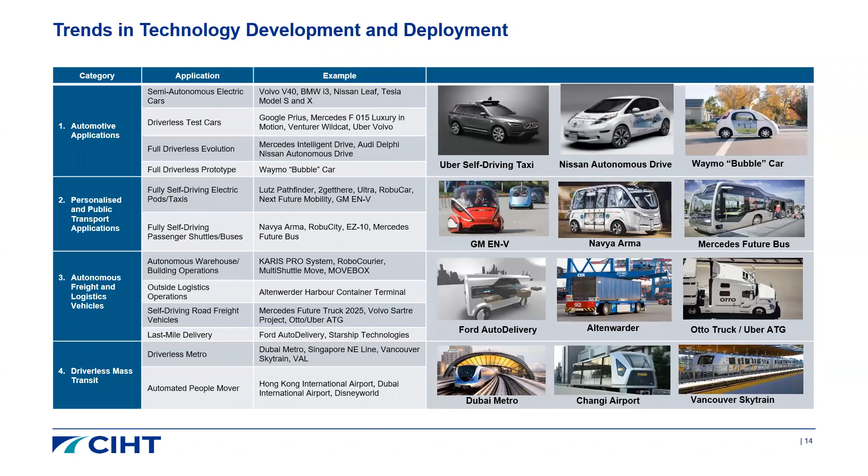As we'll hear shortly, there is a Dubai self-driving transport strategy and roadmap, which aims to go a lot further than that. If we look at how these technologies are developing, we see applications in the automotive sector, in personalized and public transport, importantly in autonomous freight and logistics, including e-deliveries as well, and in driverless mass transit. So a range of applications in different sectors pursuing at various rates moving forward.

There's a roadmap moving forward. This is an example which looks at levels of autonomy, connected vehicles, different aspects of assistance for road safety. And there are a range of different factors which will control how long that roadmap takes towards what you might call full automation of the road sector, whether it's technology development itself, regulatory approval, public and consumer attitudes, and so on.

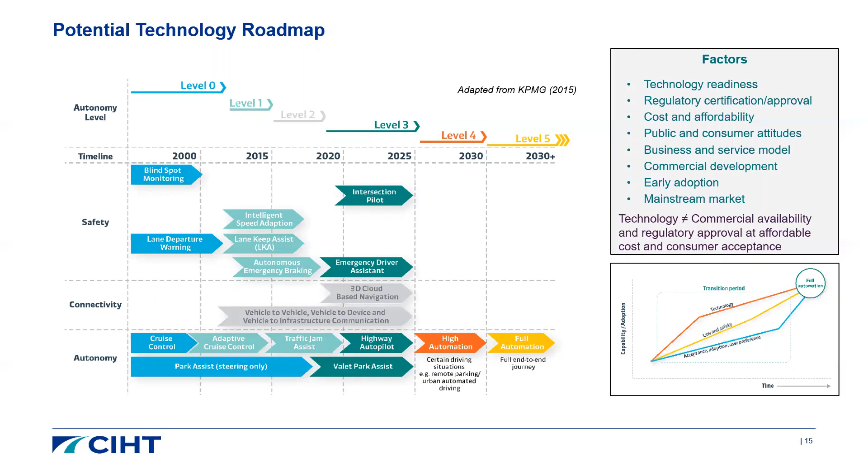And there's a wide range of predictions about how long it will take for connected autonomous vehicles to really move into the mainstream. And indeed, whether autonomy will combine with other forms of technology, whether it's electrification or different business models, moving from private ownership to taxis, ride-hailing, public transport. So actually, some people now talk about shared electric, connected and autonomous vehicles, or SCAVs, which is a much bigger proposition, promising to transform the sector in the years and decades ahead.

Just to finish the introduction, when you registered for this seminar, we posed 3 questions to you, principally in the area of driverless cars, really to get a feel for what your views were on how this technology might develop in the future.

So the first question we asked was, how comfortable are you to ride in a driverless car? Actually, most of you seem to be reasonably comfortable, almost 50% very comfortable or comfortable, and over a quarter being a bit more neutral. So compared to being uncomfortable or uncertain, you're relatively optimistic and up for riding in a driverless car.

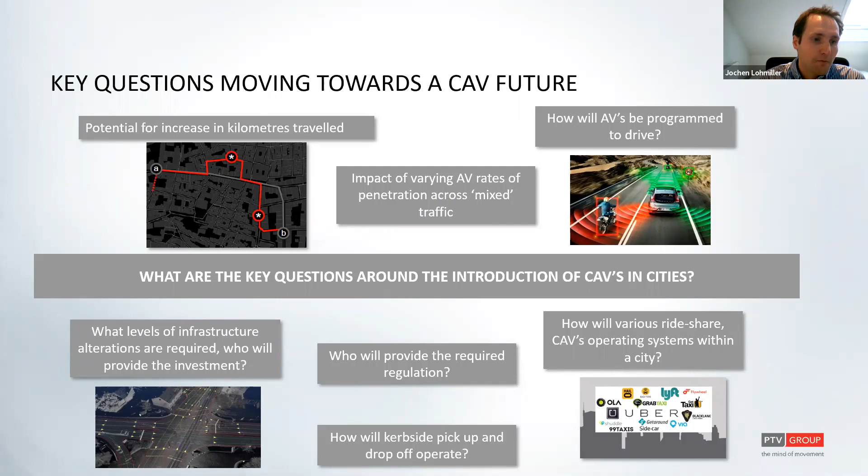Next point, if we have the opportunity to autonomously operate a taxi operation, there are a lot of players trying to get into the market - how will these different providers interplay with each other? Then there's curbside pickup and drop off, because we'll see much more valet park-like parking if vehicles can do the last mile to the parking spot themselves.

Next slide - this is probably a rather new and very popular study, also using our modeling tools. For the Highway Capacity Manual, the guideline for building roads in the US, they came up with capacity adjustment factors for connected and automated vehicles, derived from simulations.

On the table on the left, reading with a higher market penetration rate on the y-axis, there is an increase of capacity because the number is always larger or equal to 1. With connected autonomous vehicles, we have higher capacity, and the starting capacity varies depending on how optimistic the situation is.

But in the end, if you do the math, you always end up at 3,200 vehicles per hour per lane, which we might have in the future, meaning we can really have much more throughput on our roads if we have higher rates of automated vehicles.

So here the US is clearly drawing a positive picture, not saying it's going any worse. We're still not 100% sure if that is the future, and then there comes regulation into place, like if a city or a highway freeway operator says, I don't allow you to operate because you destroy my capacity on the road. And that could be a regulation: only if you can drive at least as good as a human driver, then you're allowed to drive on the road. That might be optimistic because we have issues in our cities with congestion anyway, so that could be a good approach.

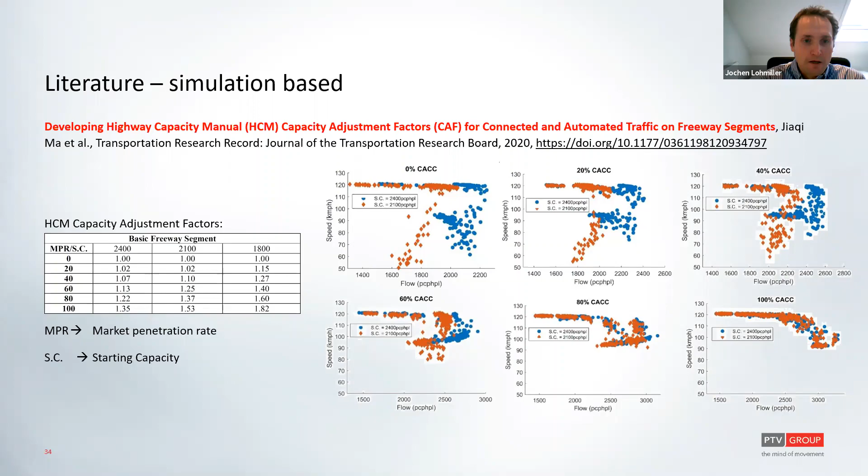So far as an overview, and as I said before, my colleague Peter Sukennik will later explain a little bit more in detail about the modeling behind this. Yeah, thank you very much. With the next slide I end, and I'm looking forward to hear the other presentations. Thank you.

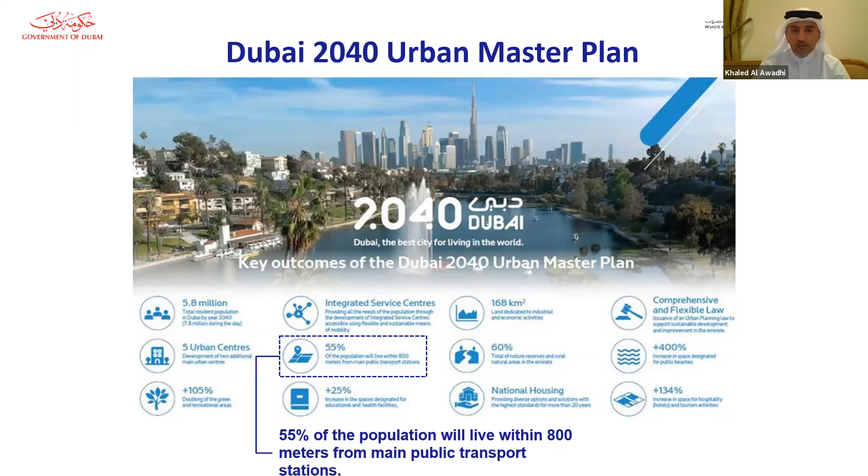Definitely looking into different aspects of making Dubai the best city. But as we can see here, which I want to highlight, the aim is to make the transportation system more friendly and more reachable to the population. One of the goals is that 55% of the population in Dubai by 2040 will live within only 800 meters of main public transport stations. So you really need a very resilient transportation infrastructure that is reachable and promotes different aspects of transportation, like what Jochen was covering in his presentation. Shared mobility is one of the main aspects to this. Next please.

It's worth mentioning that the vision of the Roads and Transport Authority of Dubai, which is driving this strategy on the government level, is to make Dubai a world leader in seamless and sustainable mobility. This is translated into strategic goals we are driving in the city, like making Dubai smart and having integrated mobility across the city, which is a goal that RTA is driving.

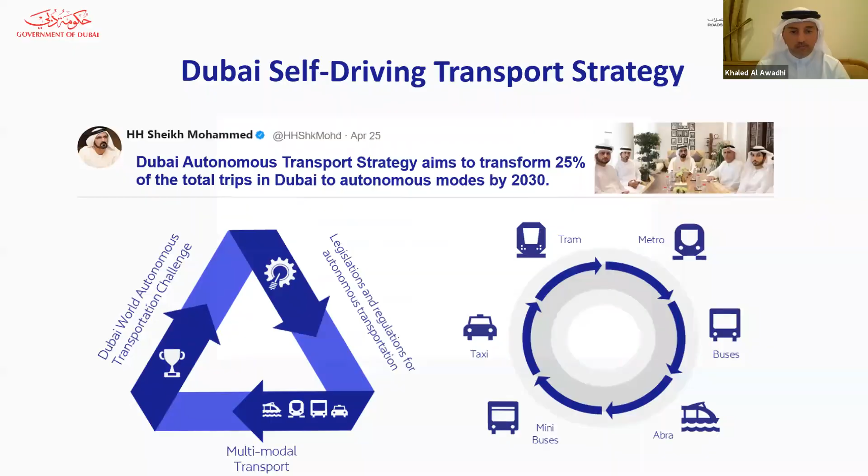These are the defined building blocks that were introduced and captured as part of the strategy. To achieve this goal, the aim of the 25%, we need to focus on multiple different building blocks that will be delivering the different projects supporting the 2030 vision.

Legislation is one of the main things we are working on. In 2019, we made a publication of the official legislation and framework for testing autonomous vehicles on the streets of Dubai. At this stage, we are finalizing the operation legislation that will allow vehicles to operate, and we expect that to be ready within 1 to 2 years maximum, enabling OEMs to operate in the city of Dubai.

There are different building blocks we're going to focus on as part of this strategy: behaviors, acceptance and awareness of the people, making sure there's adaptation for these new modes, as well as the licensing framework, insurance, and infrastructure requirements - one of the main things enabling the operation of such a transport ecosystem in Dubai. Cyber security and data privacy is always a dilemma that needs to be addressed, along with connectivity for vehicle-to-vehicle and vehicle-to-infrastructure, or simply V2X connectivity. High definition mapping is also one of the enablers that needs to exist in the city for such operation.

Generally, the modeler has two options how to model connected and automated vehicles. The first one is using the internal built-in models and adapting the available driving behavior parameters to all the submodels, plus dedicated AV-related features.

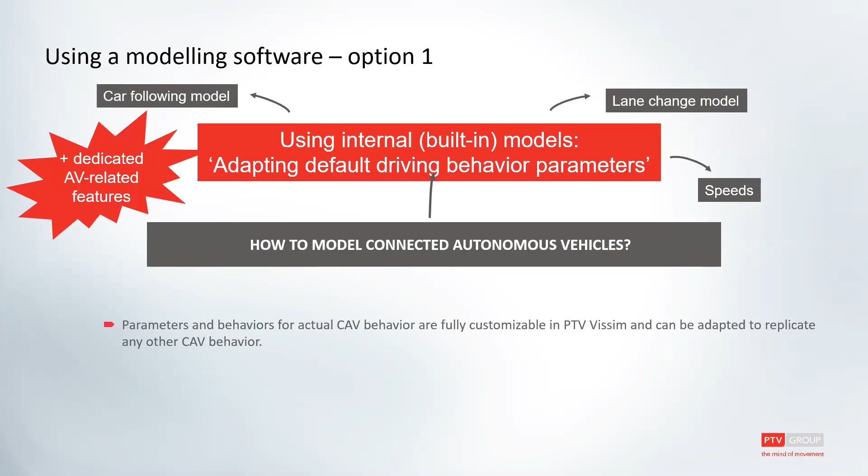One of these dedicated features might be the limitation of sensors or vehicle capabilities by setting the number of interaction objects and interaction vehicles accordingly. The idea here is an automated vehicle can see the signals ahead, but only one vehicle in front of itself, because the sensors cannot see through the leading vehicle.

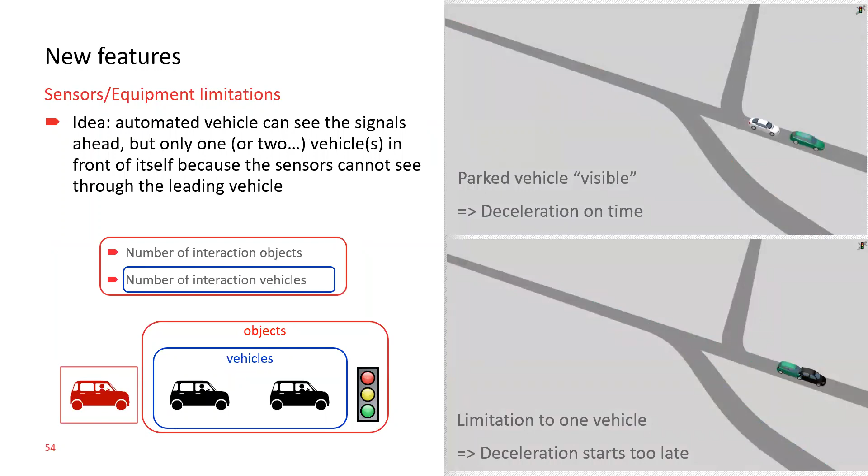This is illustrated in the videos where two vehicles are approaching a standing vehicle, where the first approaching vehicle will turn right. The top video shows the situation where the second approaching vehicle can see the parking vehicle on time and thus comes to a stop in safe distance. The bottom video shows a vehicle that cannot see the parked vehicle on time and thus starts the deceleration process too late and causes an accident.

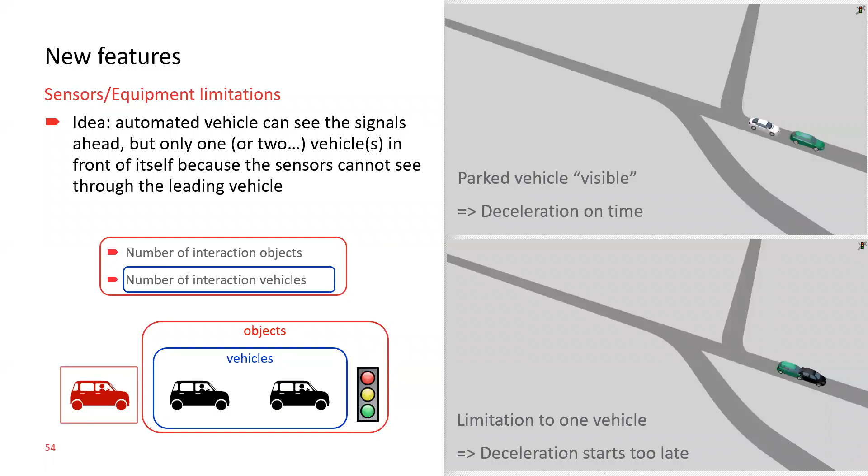Next feature is about keeping the brick wall stop distance. The idea behind this is the vehicle can stop safely anytime without a crash, even if the leading vehicle stops instantly, as if it turns into a brick wall. Within Vissim, you can activate this option and use it for cautious vehicles.

In the real world, the car following parameters might depend on the leader vehicle class. That means you can have a bigger gap when an automated vehicle follows a conventional vehicle, a smaller gap when an AV follows another AV, and an even smaller gap between two automated and connected vehicles. All these configurations can be addressed in the simulation software.

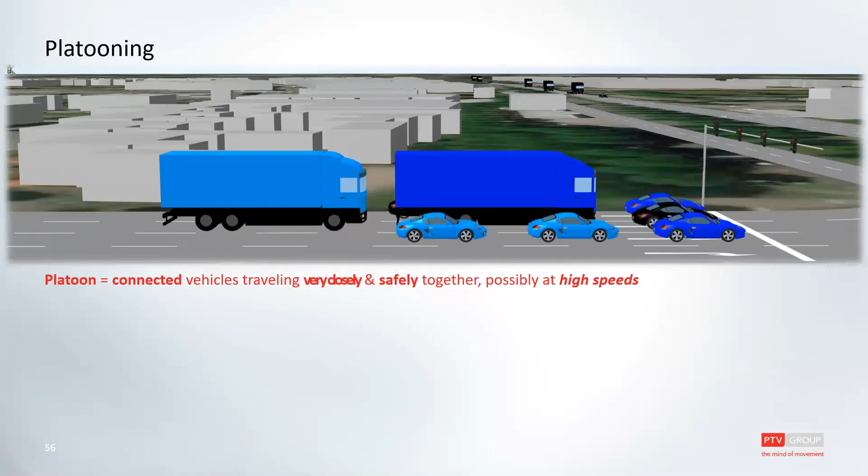Platooning inbuilt feature in Vissim is a special one. It is developed to simulate effects on general traffic. There is no simulation of platoon internals, which means stable driving is assumed. As a modeler, you can set a few parameters like maximum number of vehicles in a platoon, the desired speed, minimum clearance, or the gap time. And you can restrict platoon creation for specific vehicle classes and specific lanes as well.

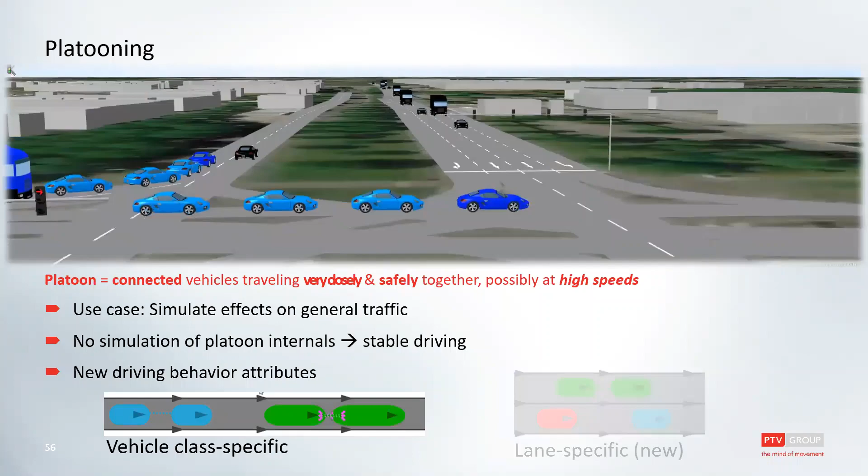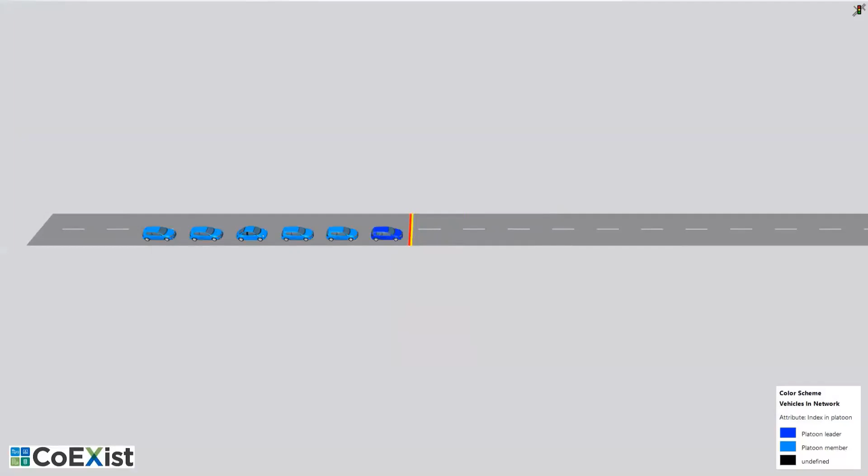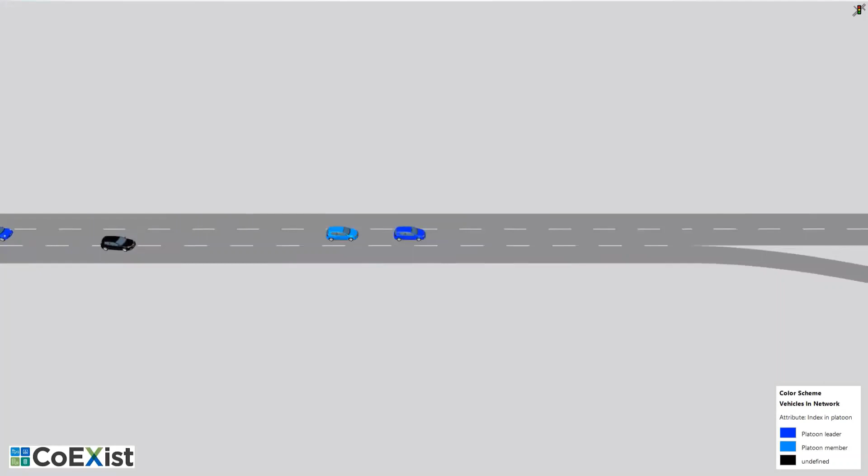This is a video of a platoon journey where at the beginning the platoon is formed by several vehicles, then they continue together, they increase the speed, and later on when a vehicle needs to leave the platoon, the gaps become larger, the vehicle can leave, and two separated platoons can continue the journey.

Later on, if the first platoon needs to decelerate or stop because of some reason, then the second platoon can rejoin and they can build a larger platoon again. And then they continue as one platoon together.

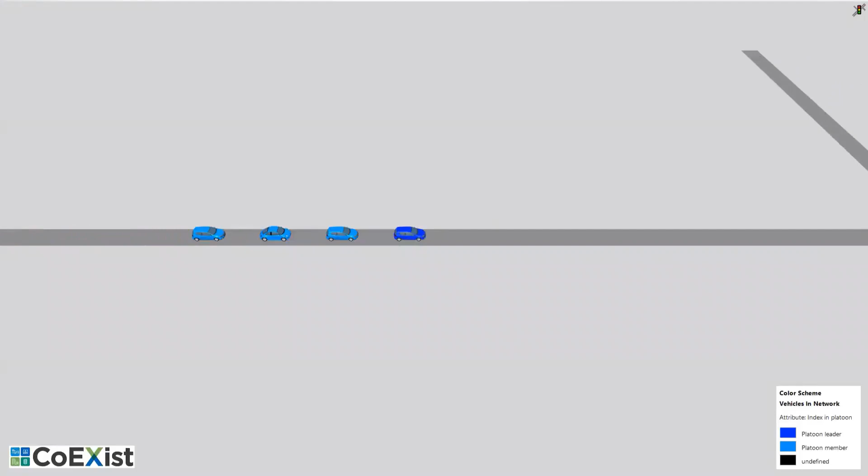And if there is a signal or an unsignalized intersection and one vehicle cannot make it through at the beginning or at the end of the platoon, then this vehicle will leave the platoon.

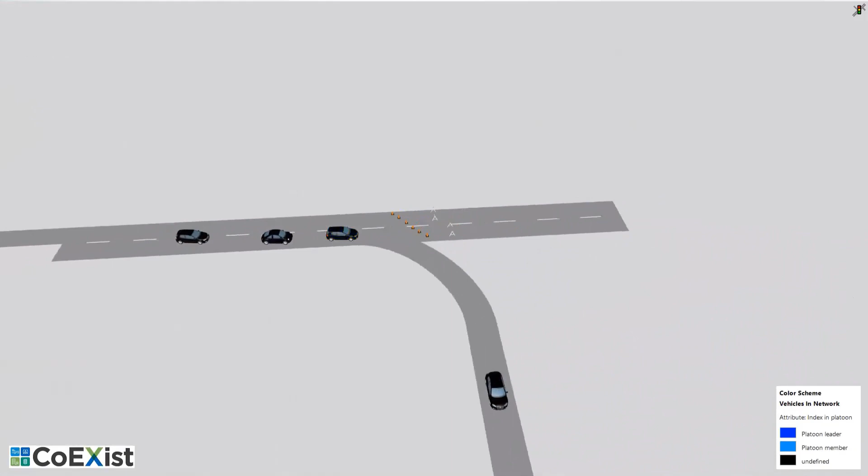Analogically, if the vehicles need to perform a lane change, they leave the platoon, and afterwards, when they drive on the same link, they can form a platoon again.

The second major option how to model automated vehicles is using interfaces with own algorithms. This is the choice for those who want to do more than the software itself offers through built-in features. Interfaces allow the modeler to change the behavior within the simulation, to replace the car following model, or to take full control over the ego vehicle and let it interact with Vissim vehicles.

With Driving Simulator DLL, it's possible to connect an external simulator used for vehicle dynamics and sensor simulation and create so-called co-simulation. This is often called a nano simulation if also the sensor simulation and vehicle dynamics simulation is involved.

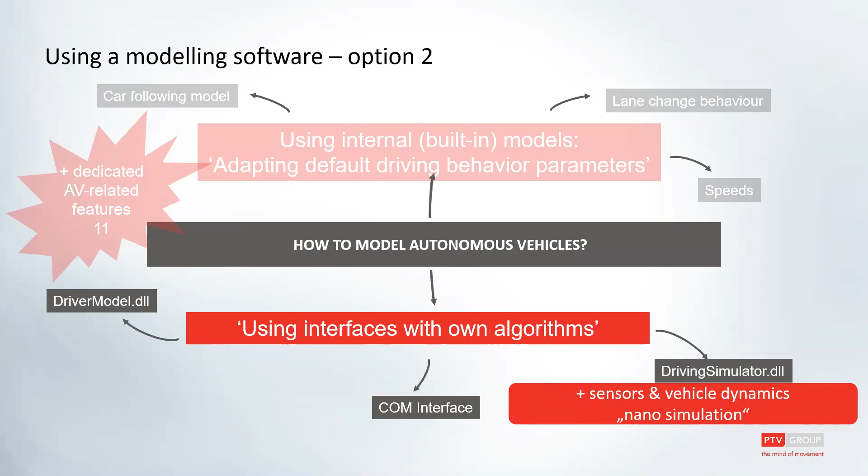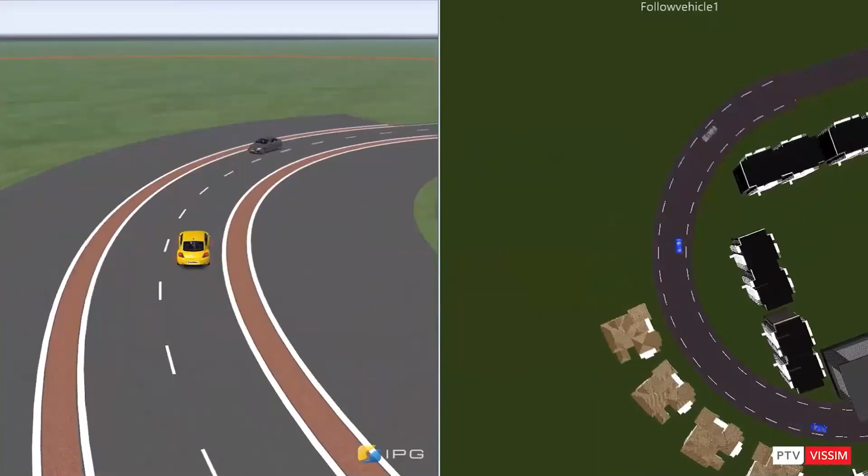Here you can see an example of a co-simulation, CarMaker software on the left and Vissim on the right. The ego vehicle is controlled by CarMaker and the surrounding traffic is controlled by Vissim. These vehicles can see each other and can interact, which means you can investigate how your control logic, your ego vehicle, performs in different traffic situations and even with different types of vehicles or pedestrians.

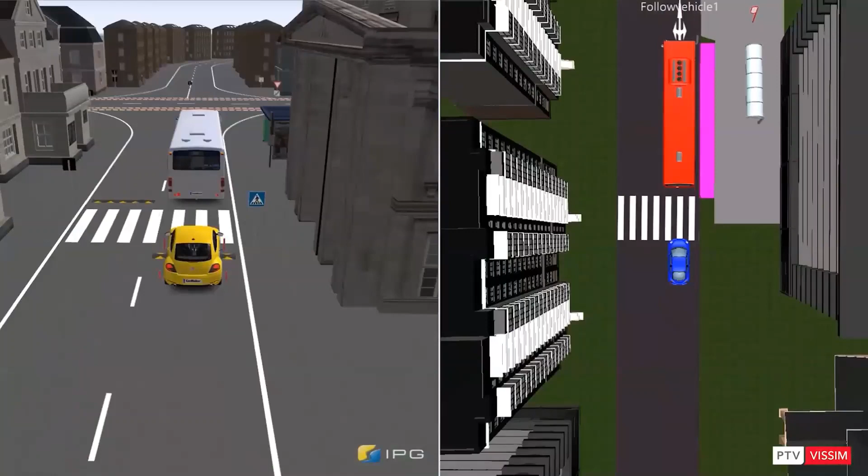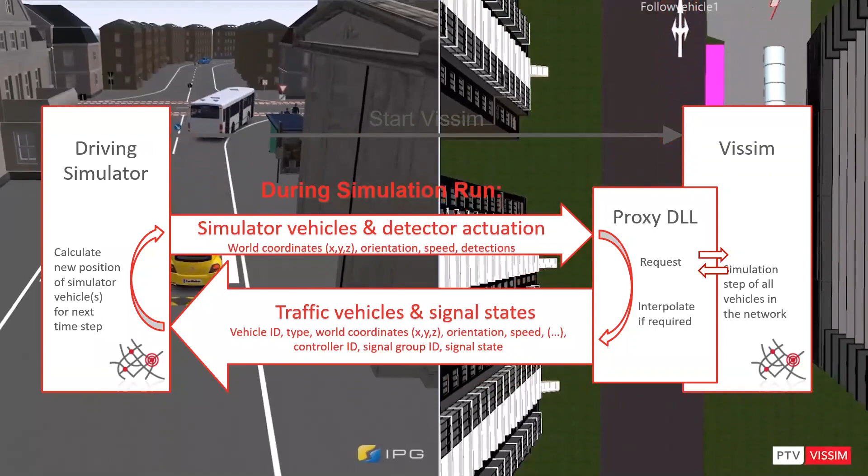This scheme illustrates the process of coordinates and attribute exchange between Vissim and the external simulator. They both operate on an identical network that needs to be defined on both sides. As you can see in the video, there are not only cars, but also buses, pedestrians and cyclists. So it can be a very rich model.

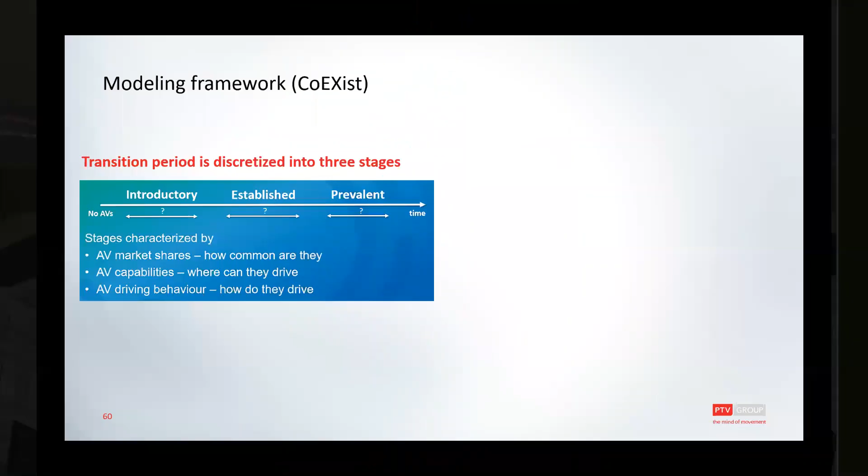A goal of the traffic modeling in the CoEXist project was to assess how the impact of automated vehicles evolves during the whole period of coexistence of conventional vehicles and CAVs, from the first introduction of a small number of automated vehicles until only a few conventional vehicles remain.

To enable such assessment, the transition period is discretized into 3 stages. The behavior of the automated vehicles is specified by driving logics, which are functionally defined. That is, they are specified in terms of how and where they can operate safely, disregarding which technologies make this possible.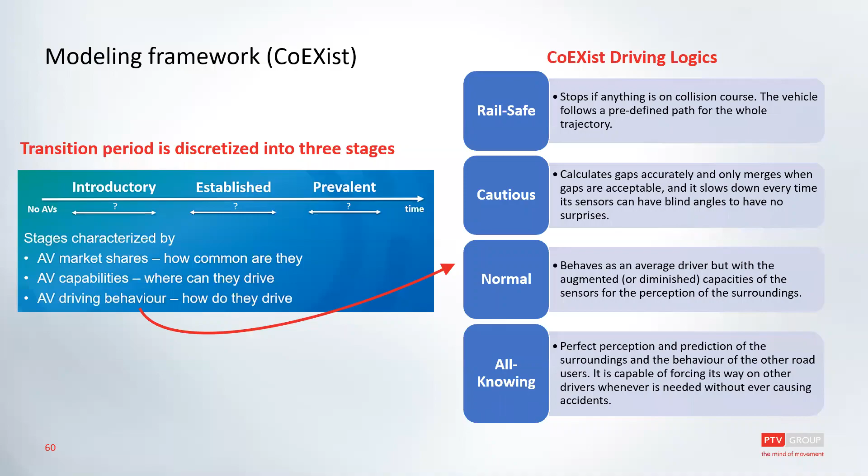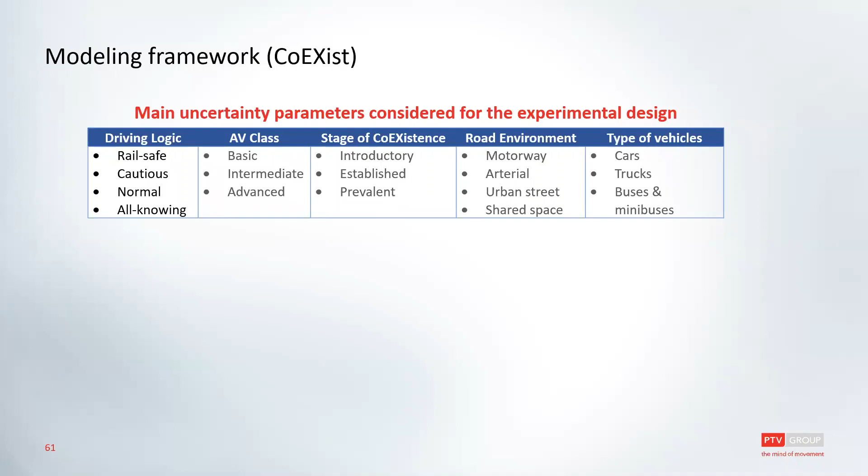Let me show you briefly 2 use cases from the Coexist project. The first one is from Helmond in the Netherlands, about a transition from arterial into interurban highway.

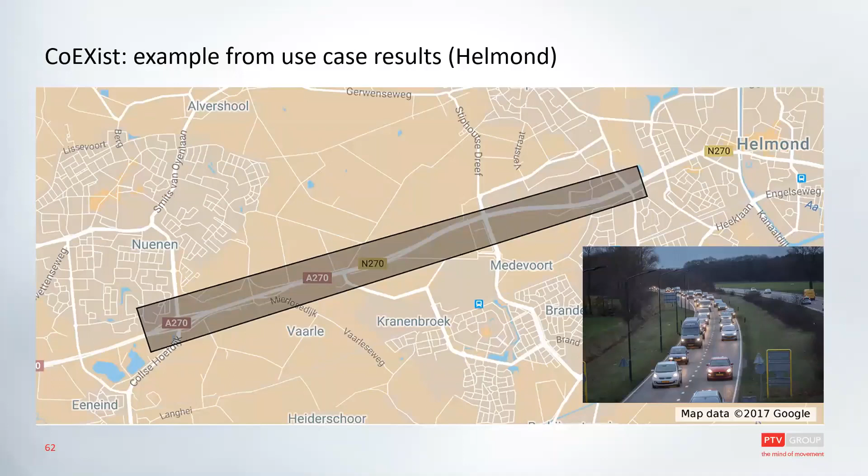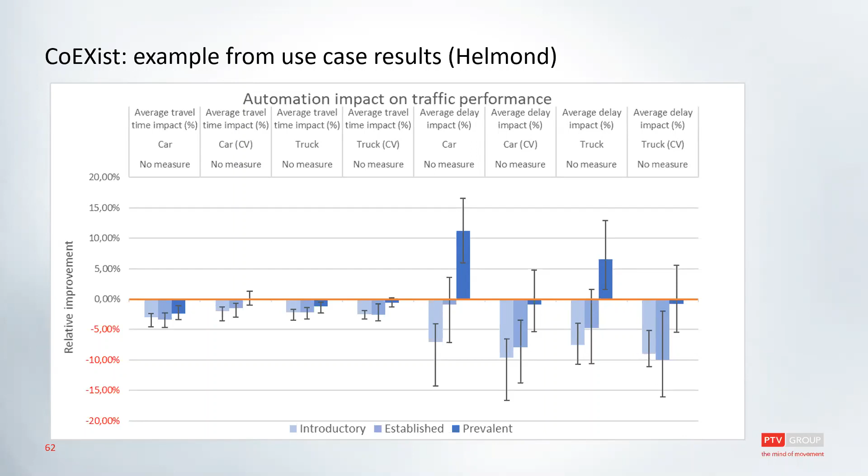You can see results from 3 stages defined by different AV penetration rates, capabilities, and driving behaviors. A specialty of this example was that a lot of conventional vehicles tend to overspeed, but the AVs obey the speed limits strictly and have a lower desired speed spread. That's why you see deterioration in travel time and some gains in delay only in the prevalent stage.

The second example I want to mention is from Milton Keynes, UK. The question was, what would be the citywide traffic consequences for Milton Keynes if CAVs become commonplace and the city center is redefined as a car-free space?

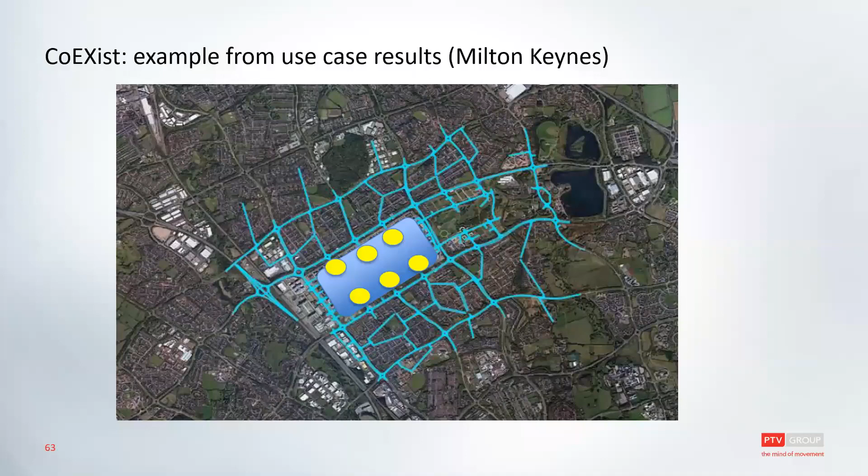Some measures were proposed and investigated as well, like creating pick-up and drop-off areas, or creating car parks, or car parks with additional lanes around the city center. The results show clearly deterioration in the introductory stage and improvement in each consecutive stage. This is what we saw in several use cases within the Coexist project, and here you can also see the differences between the measures.

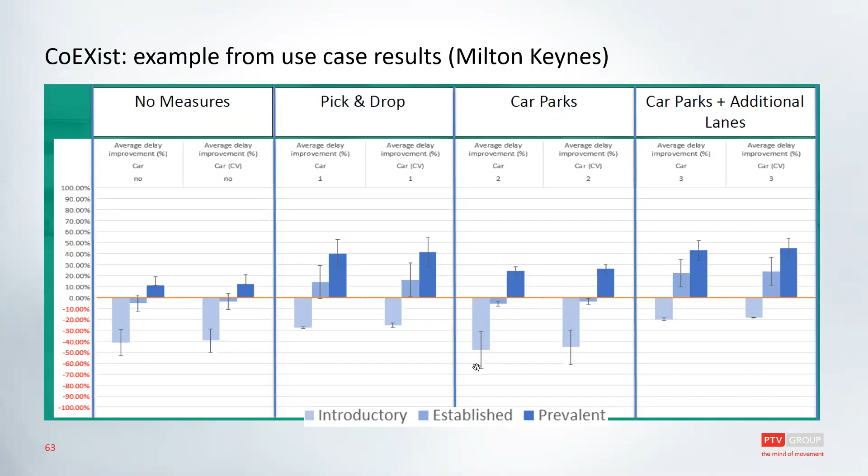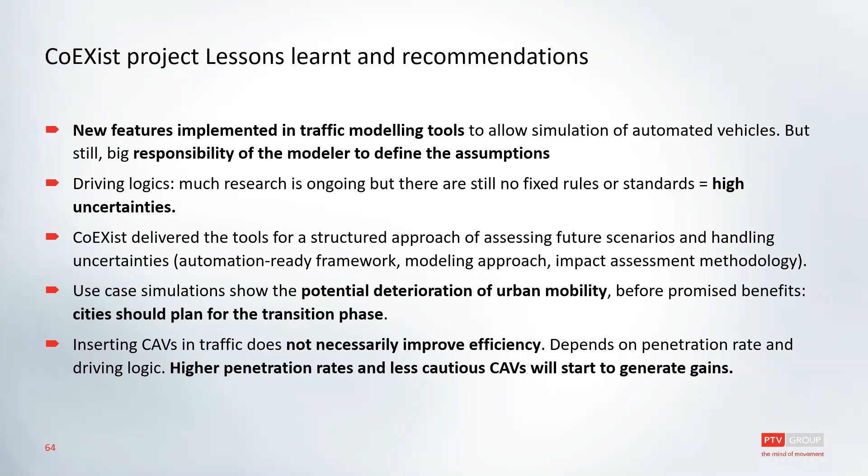If you want to know more, please have a look at the CoEXist webpage or contact me. Thank you very much.

So we've got barriers to levels 3, 4, and 5. Technology ones we know about, that's what most of the discussions are on. Institutional and governance ones, and infrastructure ones, and consumer acceptance.

And that timescale of when this will all be done is going to be determined by a group of people who are not great at talking to each other, the manufacturers and the governments. And the manufacturers aren't going to make a special car for the UAE or for the UK. We're not big enough, so it has to be something that's across large areas of the globe as standards.

The quote there from a BMW board director: two worlds are colliding here. Our world focused on hardware and our experience in making complex products, and the world of information technology, which is intruding more into our life. He said this in public. He used the word intruding in public, colliding. These are strong words from somebody who's trying to collaborate with a large part of the industry. So there's real discomfort about this.

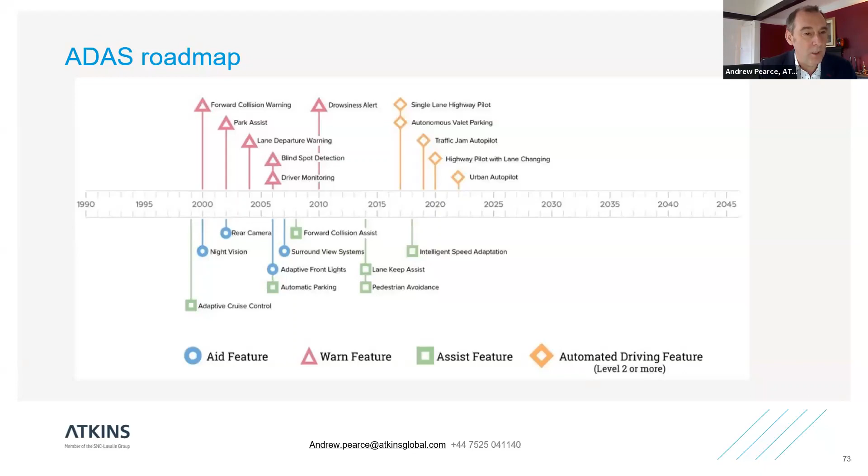So if we put together ADAS, those advanced systems which are gathering lots of really great data, they're gathering data about the suspension movement, the steering, the temperature, the air quality. They're gathering all of this and sending it around the vehicle for the purposes of the vehicle. If we can get that via an over-the-air connection, and all of these cars have a built-in SIM card, then we can get lots of benefits.

And we've done this for the UK, and we can transfer this to anywhere in the world. We grouped the benefits under those 7 groups, mainly because of the technology that goes behind each one of them. Next slide, please.

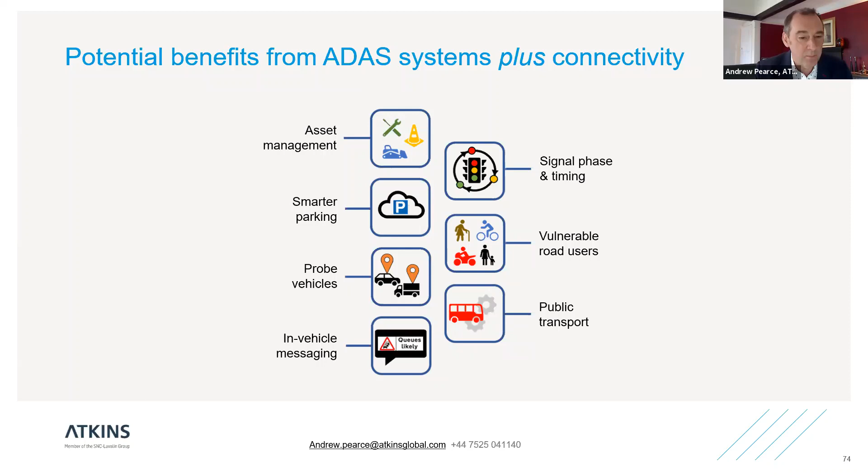I'll give you a couple of examples just to make this real. One example on asset management, which would be of interest to any highway authority, any road operator or municipality. This project done with Daimler, who are credited in the bottom corner there, looked at monitoring the condition of the road surface. So for lots of governments, the road network is its most valued asset. In the UK, it is the single most valuable thing that our government owns, and it needs to be looked after, for reasons of safety.

So we currently do this: we assess the condition of the road network using surveys, which are expensive. They can only be done every so often, and damage occurs in between surveys and gets worse and becomes expensive to fix.

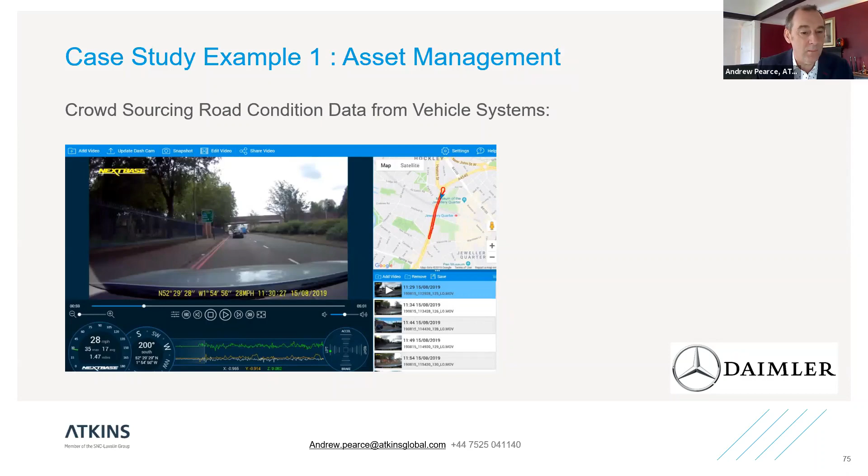That causes accidents. Every vehicle driving down the road is detecting what's going on in the road surface, and the more expensive vehicles are collecting this information internally and can send it back over the air. So we did an experiment, next slide please.

To take various different feeds from inside the vehicle and combine them together. This is called multivariate analysis, or fast Fourier transform, which is looking at any patterns. Take 10, 20, 30, 100 different data sets, correlate them over time and see if more than one thing pops out as an exception or a rhythm or a pattern, and see if you can use that to detect something that you're looking for. In this case, we're looking for damage in the road surface.

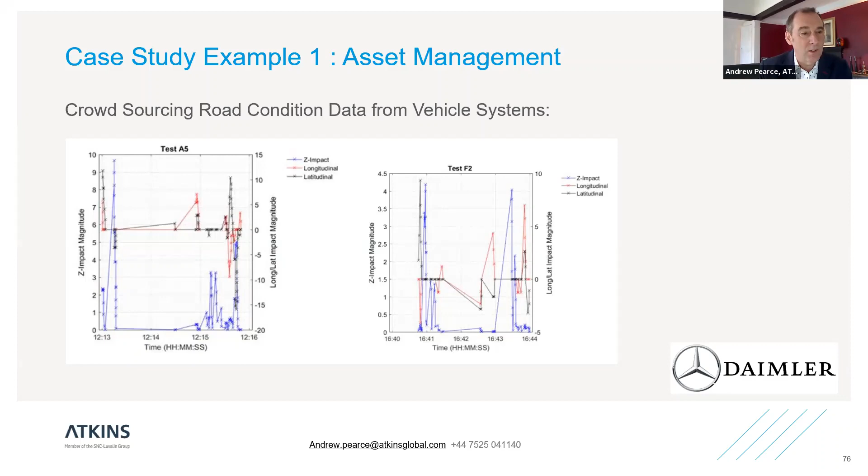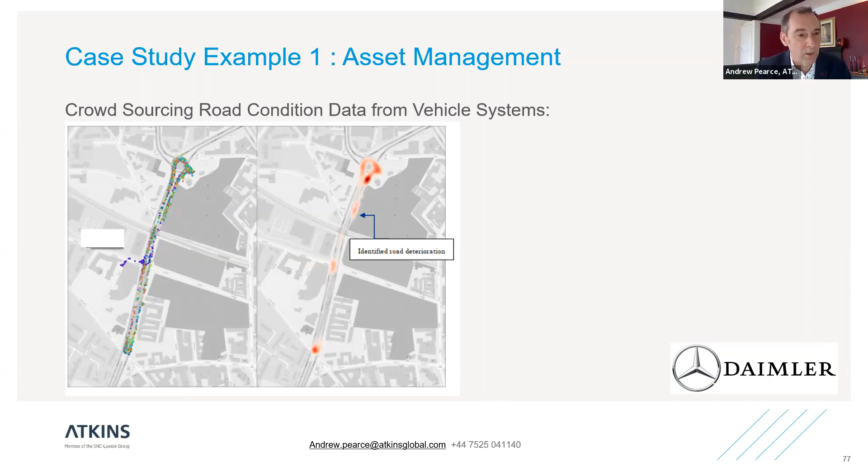So in a nutshell, what you have there is a project which says it is possible, with existing data coming out of existing vehicles, crowdsourced, free of charge, depending on what commercial arrangements you make for the data, to know where there are defects on your road network. The same algorithm can also detect accidents. It can also detect broken down vehicles. It can also detect congestion. So next slide, please.

Another example is cooperative traffic signals. Again, we're not talking about driverless cars here. As a reminder, this is just connected vehicles. This is projects that can work in the next 1 to 3 years.

But coming back to our question about how does RTA save money, how does a highway authority save money? This is the implication for an authority like RTA. Number 1, if vehicles know their own position and they report it over the air, which they can now, then detection can be removed from traffic signals.

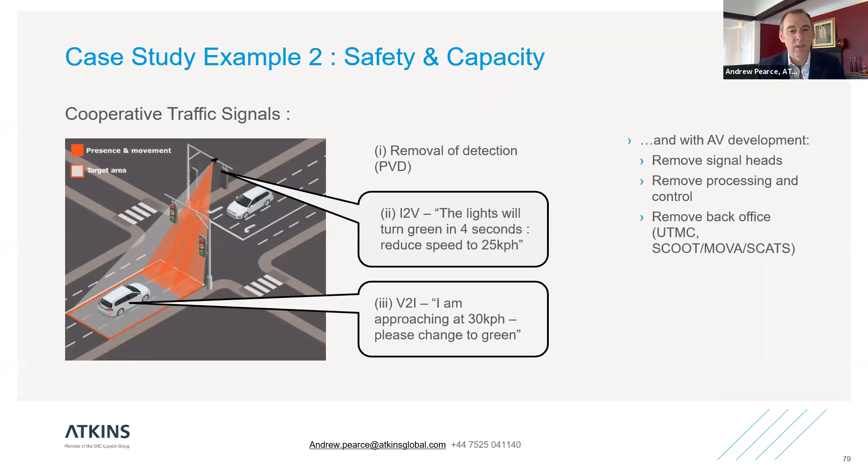Number 2, I2V, infrastructure to vehicle. It is possible then to use that same link for the traffic signals to send a message to the vehicle, as you saw in the previous slide in that photograph, telling the driver what speed to travel at. This is not an autonomous vehicle, this is a human, but a human being advised in such a way that the capacity of the signals rises. And then the third option is that the communication goes in the other direction, that the car tells the traffic signals to change. Next slide, please.

So don't read all the detail on these next couple of slides, but just in terms of process, we took those 7 different technology areas and then arrived at a set of actions that needed to be done to yield benefits to move this forward. With the examples we just showed, there are obvious questions there about a tie-up between the people who have the data and the people who need the data.

And of course, these things can be ranked in terms of their difficulty and their cost and who needs to take action. So this is all about being really pragmatic and getting stuff done, getting it moving. We won't do all of these things in the UK. We won't do all of these things anywhere, but we will be able to do some of them and get some of the benefits straight away.

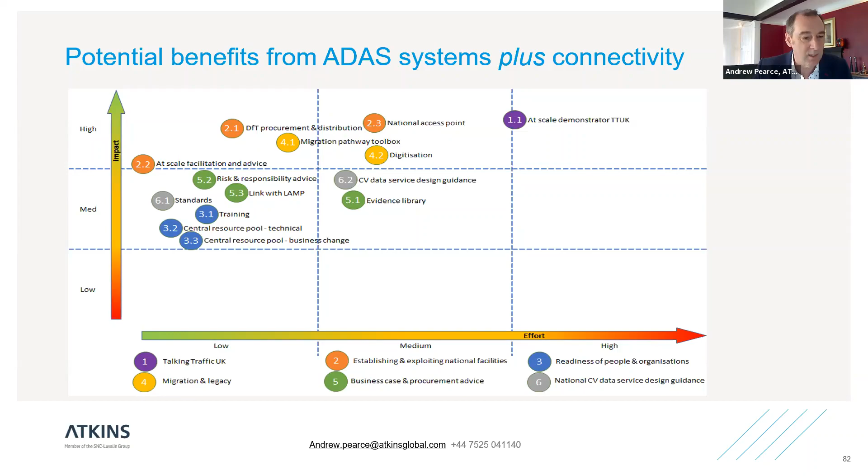Next slide, please. And then for each one of those things, a more detailed action plan is produced with what's required now, next, and in the future.